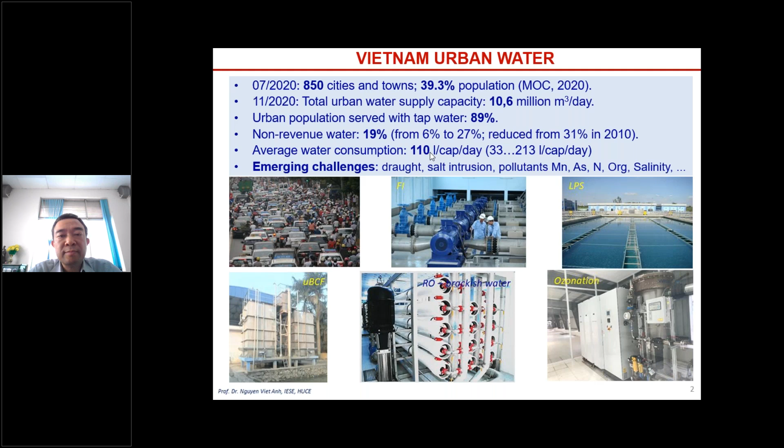Talking about urban wastewater, so far we have more than 50 municipal wastewater treatment plants in operation, with a total wastewater volume treated of 1,200,000 cubic meters. This is still far from 100% of wastewater generated being treated, but cities are now constructing new municipal wastewater treatment plants.

Talking about the financial needs for the whole sector in the country, every year we invest about $200 million for wastewater projects. In order to provide 100% of the urban population with water supply, we need from 3 to 6 billion US dollars. For non-revenue water management alone, we need about $500 million to reduce the non-revenue water percentage down to the range of 15-18%. And we need from 8 to 10 billion US dollars for 100% urban wastewater treatment.

The private sector is actively taking part in water projects, including equitization. 90% of water supply companies in Vietnam have already been equitized to different extents, and the private sector is especially active in BT projects. In big cities, the private sector is already operating water treatment plants and competing with public utilities.

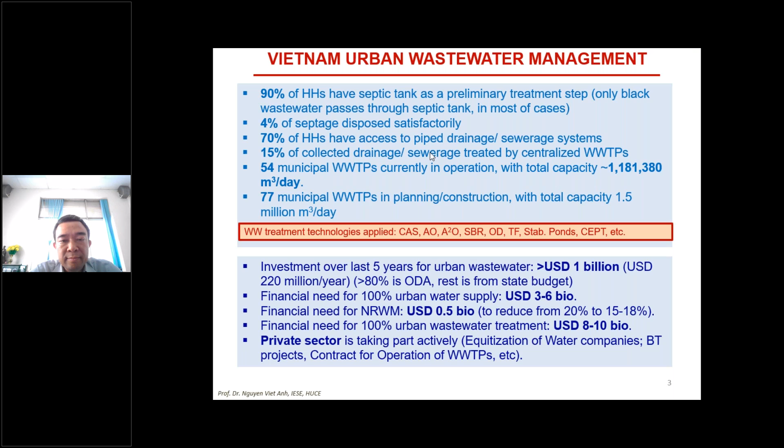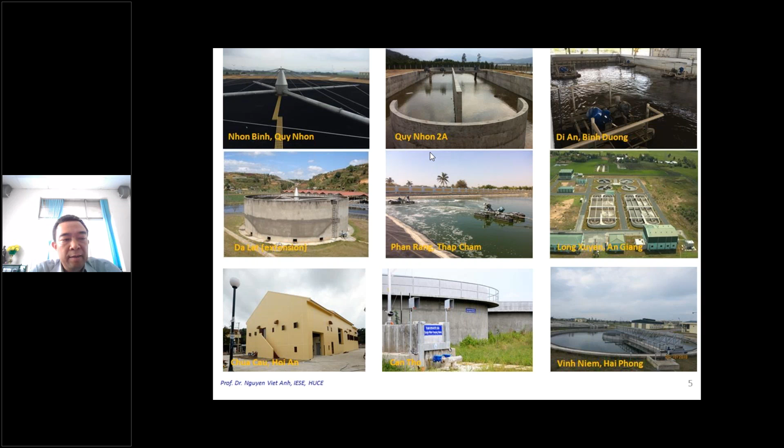These two slides show the latest wastewater treatment plants in cities which are in operation using different technologies, including activated sludge, oxidation ditch, sequencing batch reactor, trickling filter, and even oxidation pond, among other processes. Different cities are open to different technologies.

Talking about industrial wastewater management, this is also a very interesting segment where all industrial parks are mostly invested by the private sector or privatized, equitized enterprises. And in all provinces, we have industrial parks which daily produce about 900,000 cubic meters per day of wastewater.

By law, all the wastewater treatment plants in industrial parks should adequately treat the wastewater, but in reality only about 80% of them are considered meeting effluent standards. The others are under upgrading, so they have to improve, and some systems are now required to move from class B to class A.

The average capacity of wastewater treatment plants in industrial parks is from 1,000 to 4,000 cubic meters per day. We are still not talking about the individual wastewater treatment systems invested in by the factories. So this is a big market where we have different types of wastewater, different scales, different treatment processes, and different equipment required.

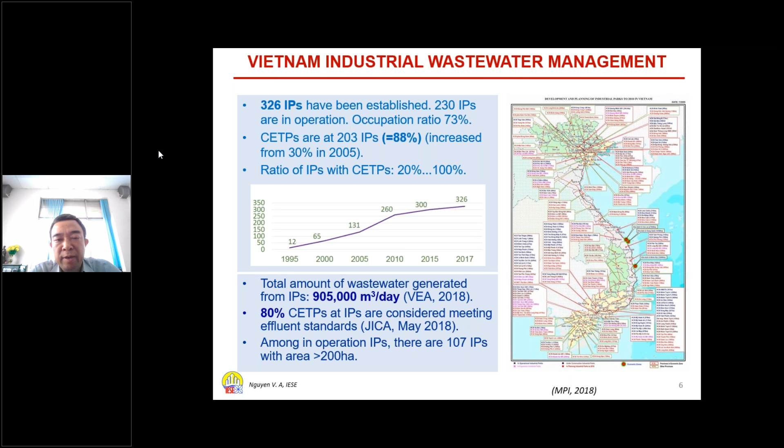In industrial wastewater management, the polluter pays principle is strictly applied. And as I mentioned, in many river basins we are going to apply class A effluent standard instead of class B because of the already overloaded capacity and the upgrade requirements.

Environmental impact assessment is compulsory for all investment projects, but post environmental impact assessment activities are also required. Now all treatment plants with a capacity of more than 1,000 cubic meters per day are required to install automatic monitoring stations, where data should be automatically transferred to the authorities for real-time checking.

So there are other environmental protection tools, command and control tools, applied. Besides, companies can borrow money from the Vietnam Environment Fund and other financial sources to invest in wastewater treatment plants, which should be ready before the investors can come.

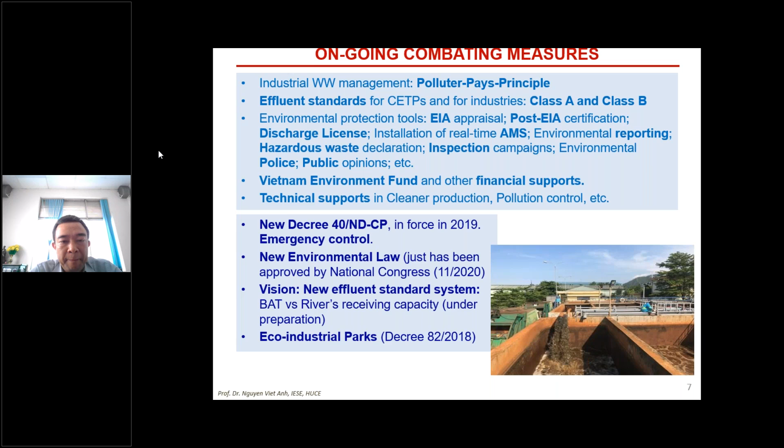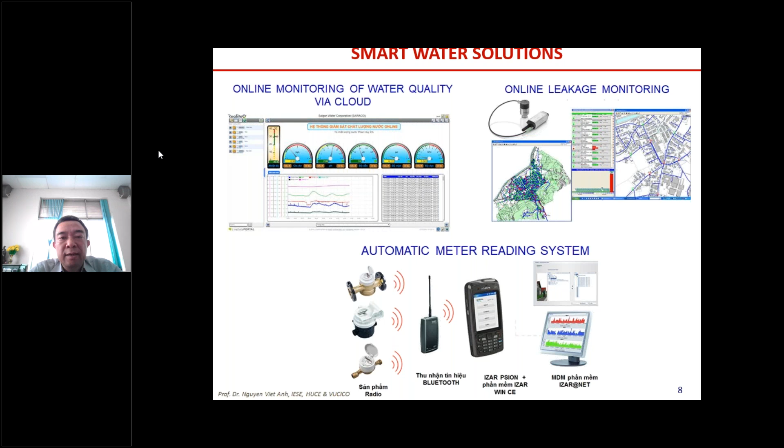Now the government, the scientists, and the industries are paying a lot of attention to this. So this is also a good topic for discussion.

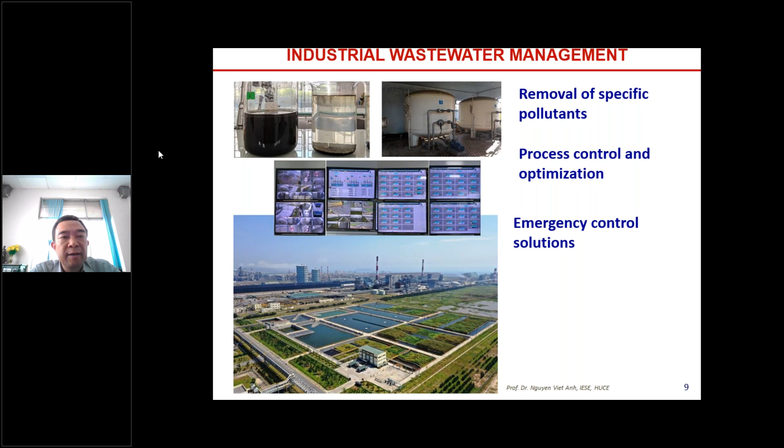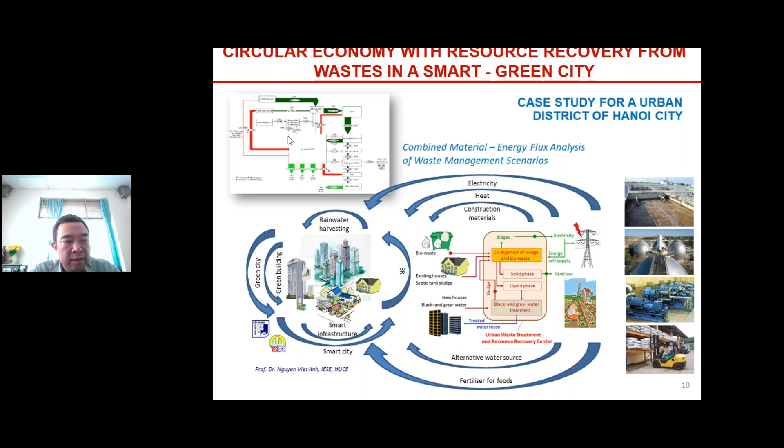Another new emerging topic is to integrate waste management in a smart green city, where we can recover resources from waste, reclaim and use wastewater after proper treatment, and save energy and resources. We already have a set of criteria for green buildings, and more than 20 cities in Vietnam already have plans to become green cities, where waste management in an integrated approach is a very important topic.

Because of climate change, changing rain patterns, sea level rising, plus inadequately provided infrastructure, flooding is still happening, including in big cities like Ho Chi Minh City and Hanoi. So providing sustainable urban drainage solutions for cities, existing and new urban areas, is a very interesting topic, and we have a lot of room to develop solutions and do business.

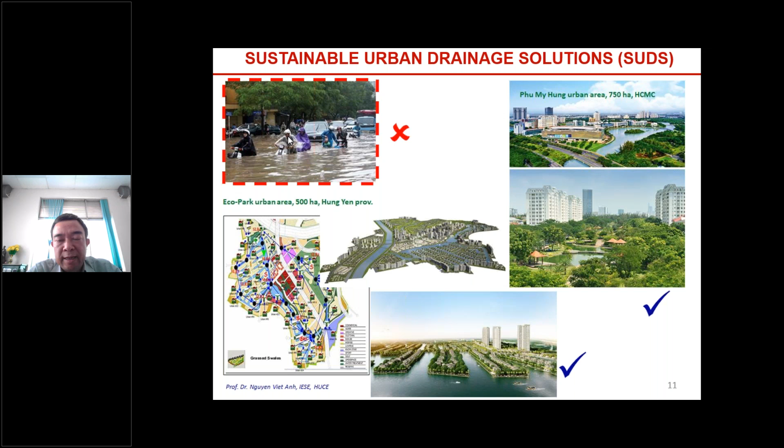So I would like to highlight some business opportunities for our discussion. We have a lot of room because the sector in Vietnam is under intensive development, expansion, improvement of service quality, increasing demands from the users, raised awareness, etc. So we have a lot of driving force to do the business.

For water supply, the activities in the non-revenue water solutions, efficient monitoring and management solutions, smart water solutions, and special processes to remove substances which are very hot topics, very hot problems in many provinces, like organics, nitrogen, manganese, and salt intrusion.

For the wastewater, technologies and equipment for specific pollutants, and for wastewater reuse, and also sludge treatment and solid waste management, and besides the system monitoring and management solutions under big interest.